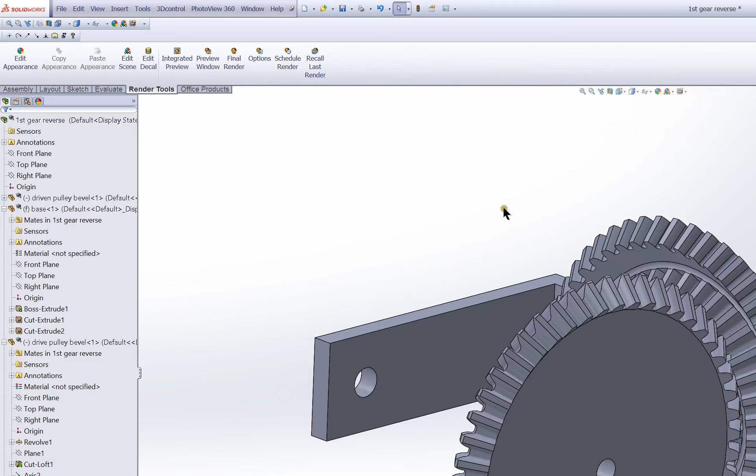This was the project. He wanted to have a set of gears. You can see it better on this edge. So this is first gear in reverse, and then you have other settings like third gear forward, for instance.

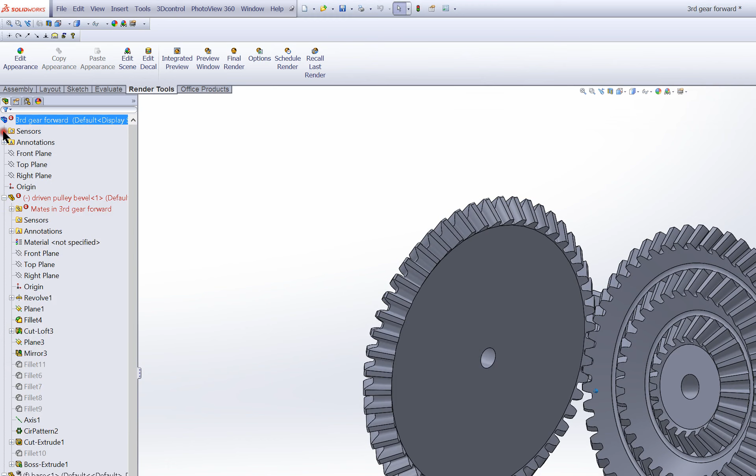There's some kind of error. Yep, hold on, I'll fix this. Okay, I think I fixed it.

So we have different radii, I guess is the correct term. This is a 1-to-1 gear ratio. Here I don't even remember exactly what it is, but it gears down, and I couldn't get it to be perfectly 2-to-1 or 3-to-1, because otherwise it wouldn't really fit in there. But it does gear down quite a bit.

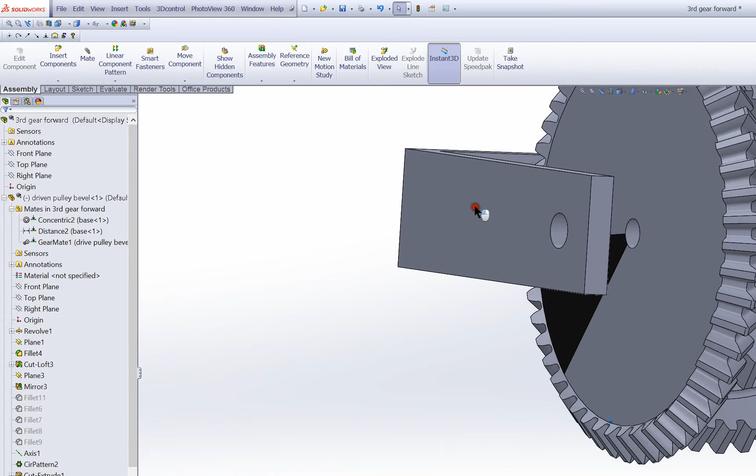I put that black triangle just so you could see more of what's going on. We went with this, called a bevel gear, where you have two 45s coming together. It's not a perfect bevel gear, but it's pretty close.

So I'll walk you through how I built it, starting with this guy because he's a little bit easier. Let's just roll him back.

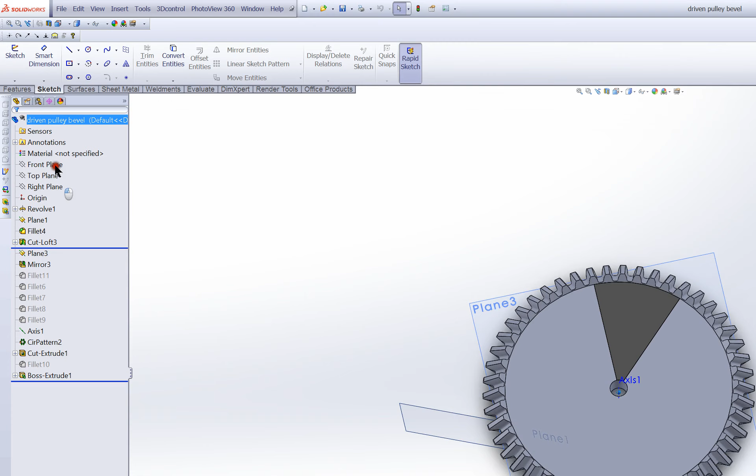Okay, so this is where I started. I started with a revolve that gave me something like that. If you look at the sketch, it's just kind of this weird spike shape. These are all 45-degree angles, so since I'm doing a 90-degree overall angle, I did 45s.

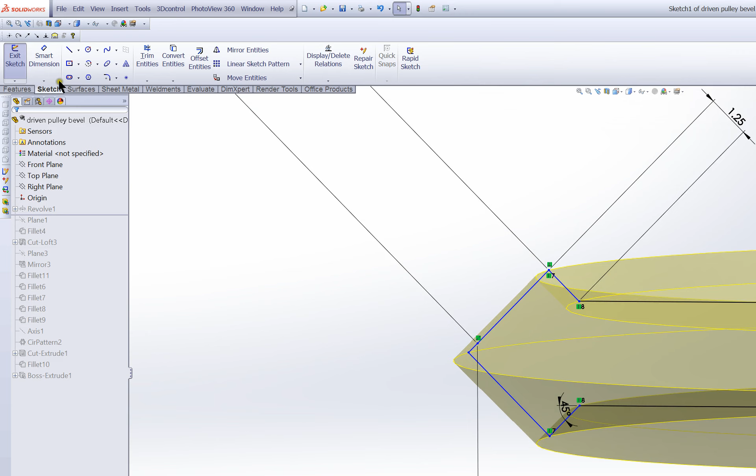These are my dimensions, just to keep them with your original dimensions. So what we're going to do is... okay, hold on, sorry about that, my Solidworks crashed.

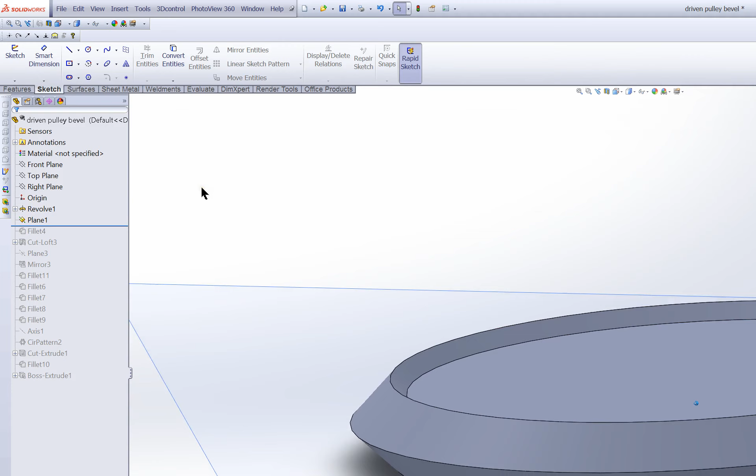So we've got this disc thing, and we're going to be cutting teeth through here with a circular pattern. The first thing I did was make a plane that is normal to there. The way you do that is go to Features, Reference Geometry, Plane, and then choose that guy, and there's a point somewhere over here.

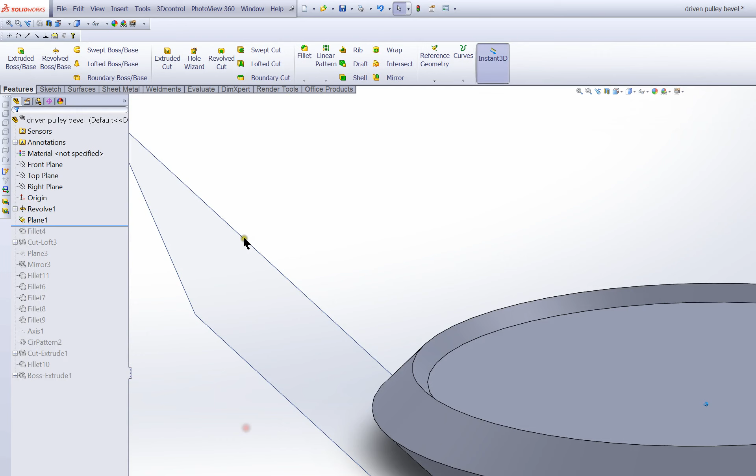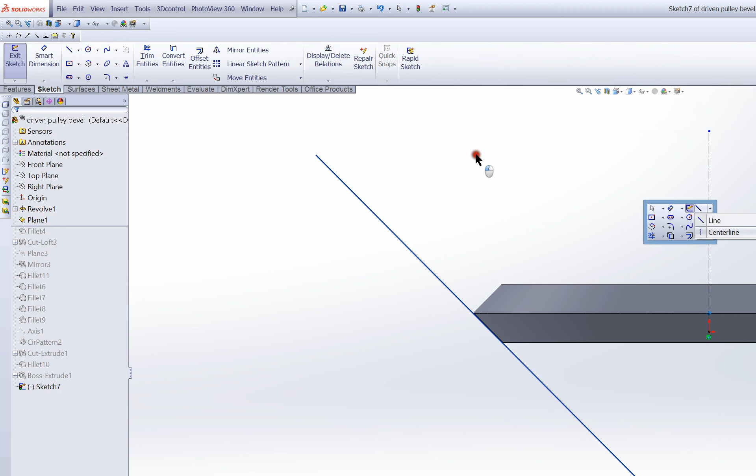So what you do is put a sketch on the front plane. Let's go normal to that. Then you do a center line, and another center line. From here, I'm going to keep it collinear with this silhouetted line here, which can sometimes be hard to select. So collinear, and then you merge these 2 points.

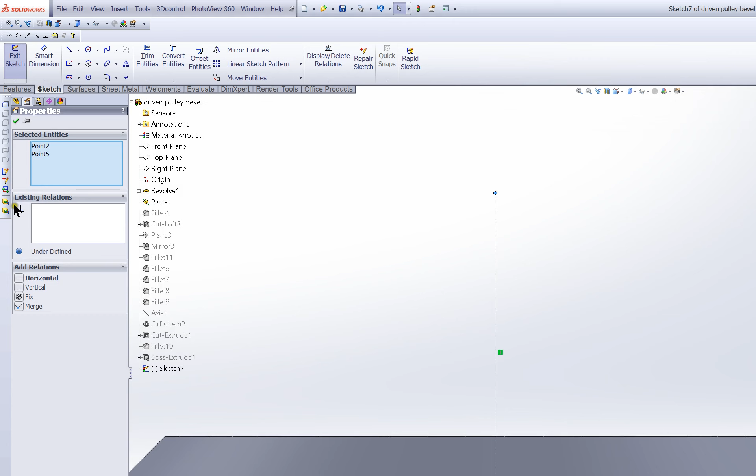Now you have a line that you can make your plane orthogonal to, so you exit out of that sketch. Features, reference plane, select that point, select that guy, and check. And you got your plane.

But we don't really need this plane, I'm going to keep that sketch there just for reference. So then what I did was put a real soft fillet around this edge, so it kind of breaks the edge.

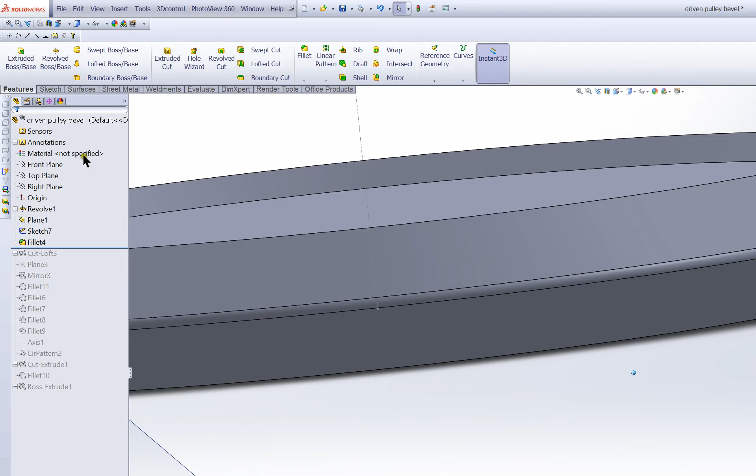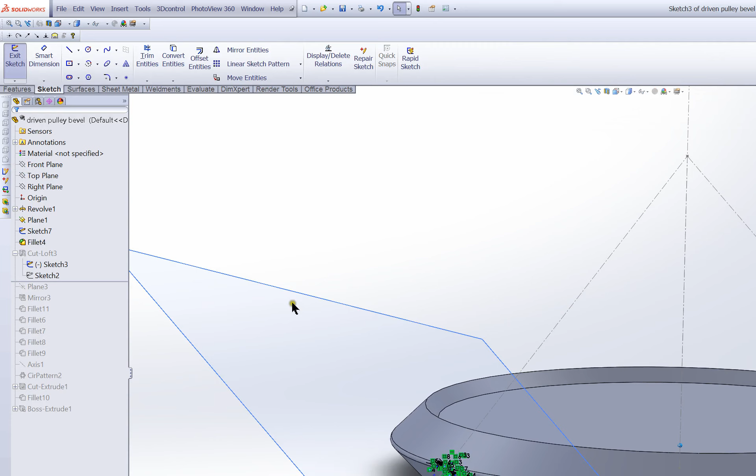Okay, now this is where we start to get technical. What I did was I did a sketch on that plane, and you can see I did a similar sketch just going the other way. Now that you can see it, we can delete this guy's sketch. So I edited this guy's sketch.

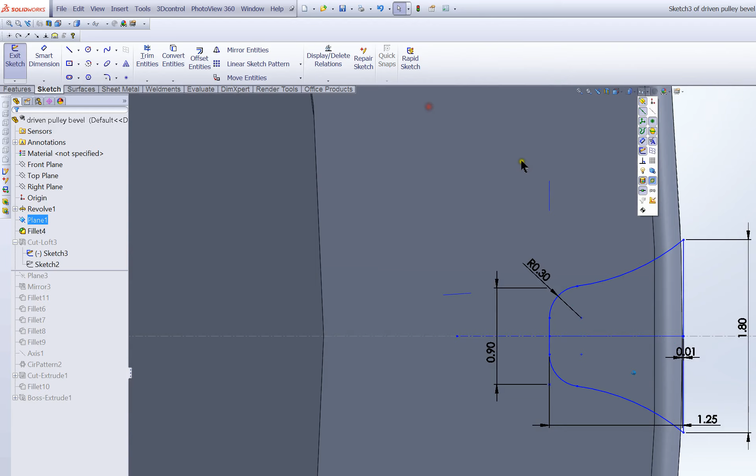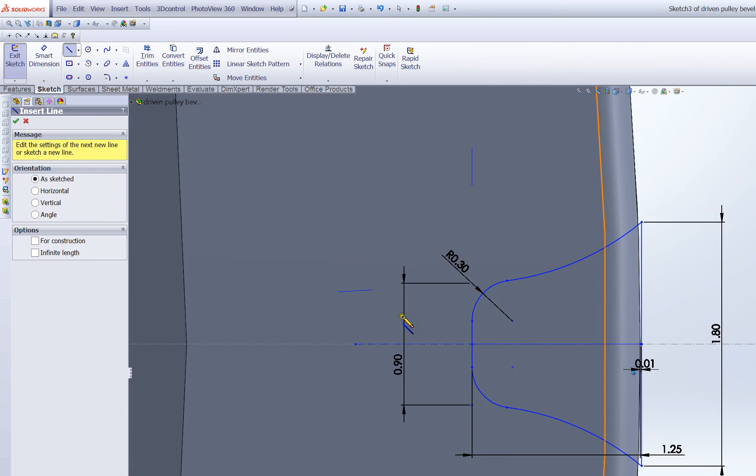Okay, I'll hide the relations because there's a lot of them. So just this kind of shape, I made this a little bit high just so it makes sure it cuts through everything. And then I did a line from here to here, an arc from here to here, and then an arc from here to there. I just gave them these dimensions and kept those consistent across all three of the gear ratios. So exit out of that.

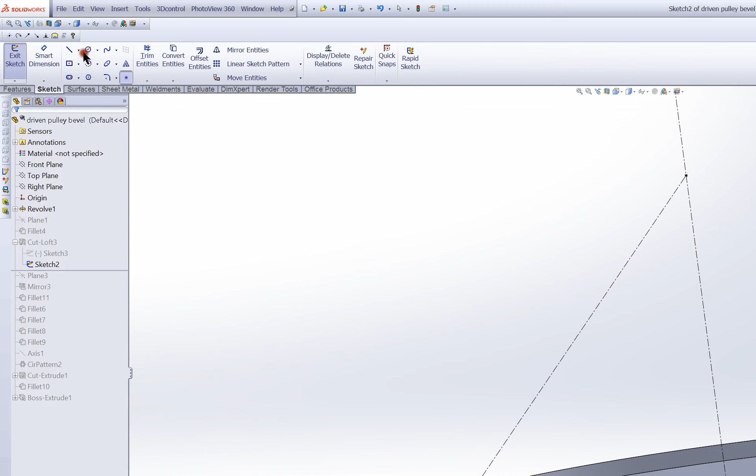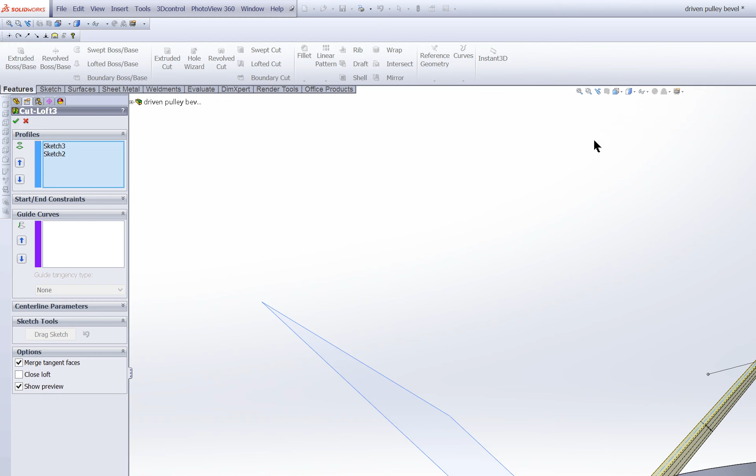And then we've got this sketch, which I showed you before, where it's just collinear and it comes up and hits this point. You have to actually take a point and put a point there. That's important, because what you do is make a lofted cut from this up to this point. If you don't put a point up there, it has nothing to zero in on. So if you're having trouble getting it to recognize that point, you've got to go and physically put a point in. So you select that, and that gives you a nice cutout.

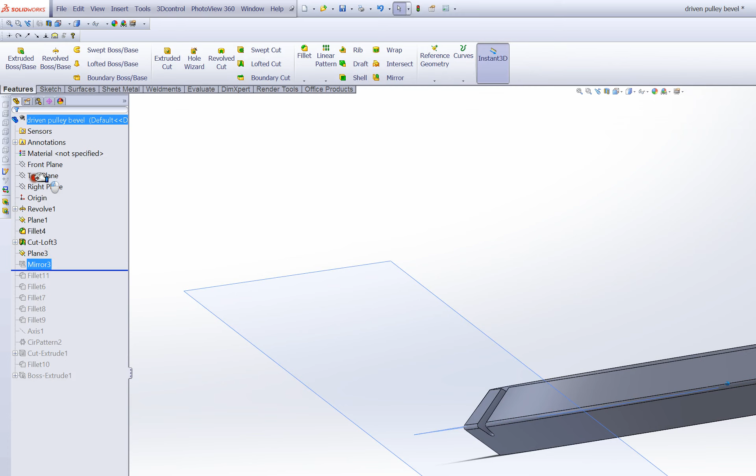And then I put a center plane in, which I selected this top face and this bottom face to give me a mid plane. I did that because I wanted to mirror it. So I just did a mirror of this feature, the lofted cut. And then I filleted something—no, I suppressed that. I suppressed all of these because they aren't needed.

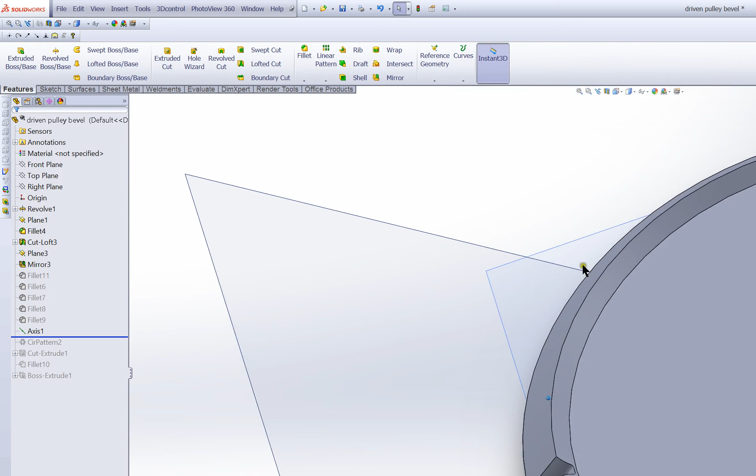Okay, so then I put an axis here. The way I defined the axis was it's in reference geometry. And then I did two planes where they meet, and the front and right planes give me a nice central axis.

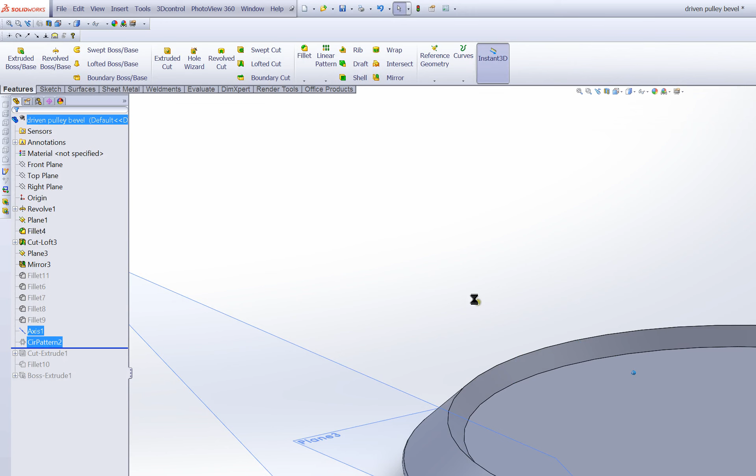And then this is where it starts to bog down, as I did a central pattern, or circular pattern, about that axis with these features. Let's see, how many instances? I did 50 equal spacing, and I just based that on eyeballing it, that they look pretty equal.

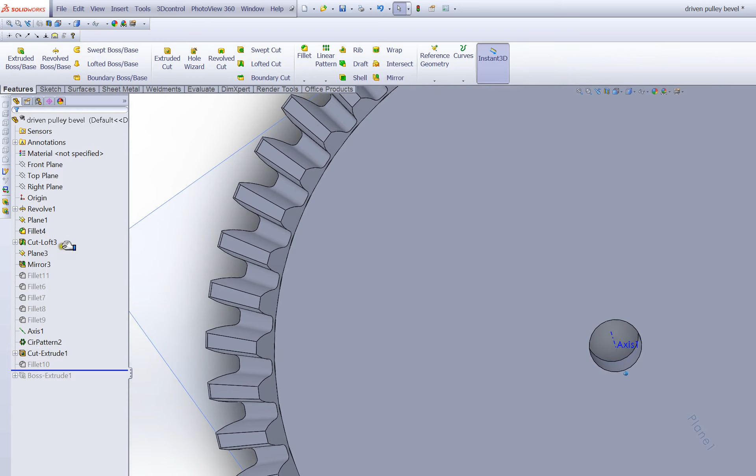And then I cut out the circle. And then I put this little black triangle just so you can see it spin a little bit better. So that is how I made that part.

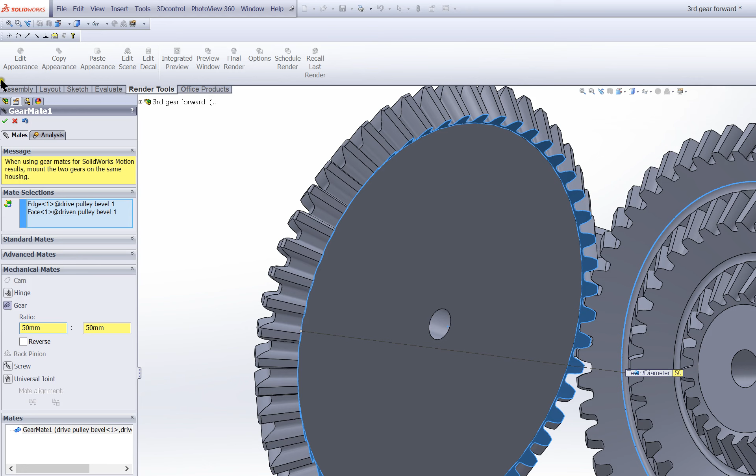And the next one's a little bit more involved. So here we are again. Oops, I got my gear ratio off a little bit, didn't I? There we go. So I will show you how I made this guy.

Kind of looks like a cool little pie. This guy took a little bit of thinking to get done, and it's still not really perfect, but it shows the concept.

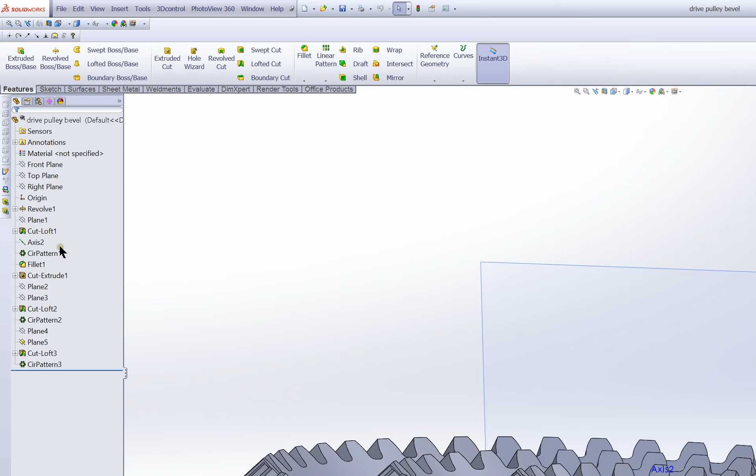So starting from nothing, I did a revolve kind of similar to the last one, just with 3 of them. The sketch, yeah, there's my dimensions. It's kind of like a toothy looking thing.

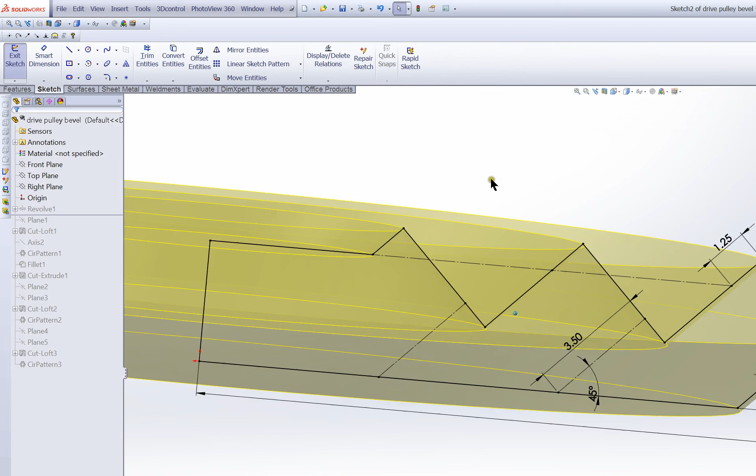I had a length come out here, 45 degrees up, 45 degrees over. I kept this dimension the same off of the previous one because this was the depth of our teeth. And then I made it come down far enough to where our gear would be able to fit inside of there, the little pointed end of our gear.

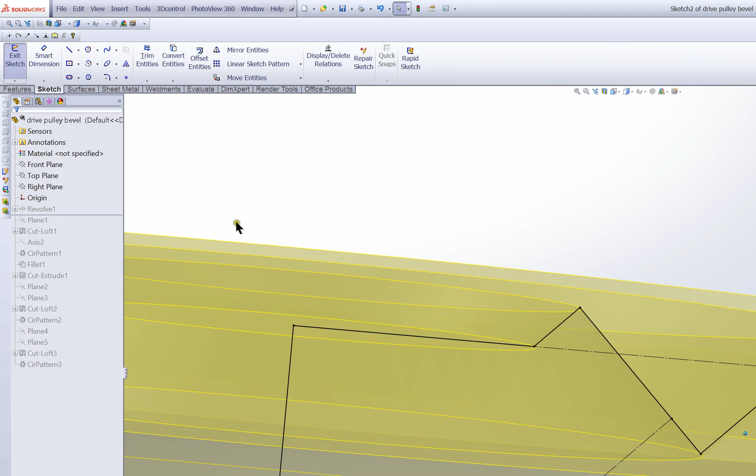And then I just offset these guys over until I had 3 of them. And then I just left the center one thicker just so we have more strength in the center. So revolve that.

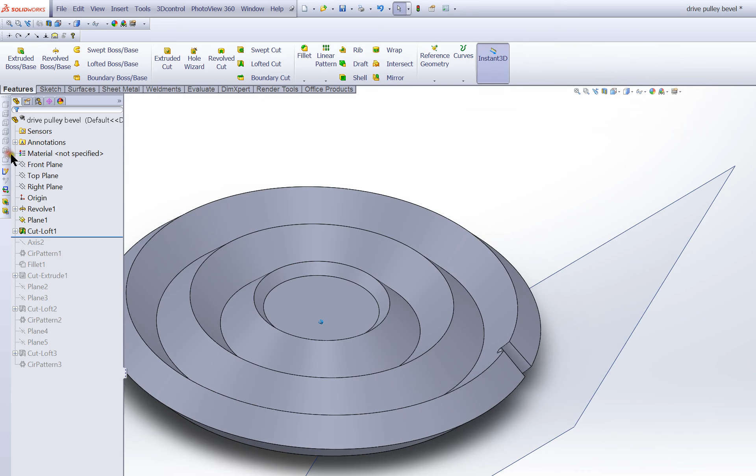I did a similar method, was showing this plane here with this sketch. You actually don't need these guys just yet, so don't worry about those. But same way that we did the last one, just draw a line from there to a central axial center line.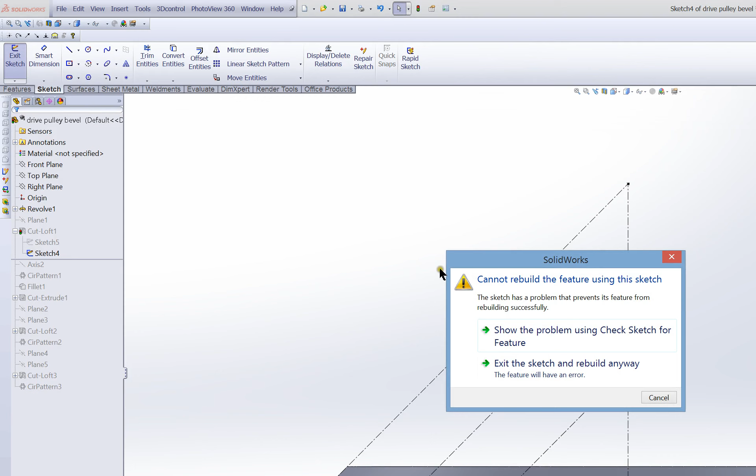Maybe I do need them. Okay, whatever. That's what I get for screwing around with sketches.

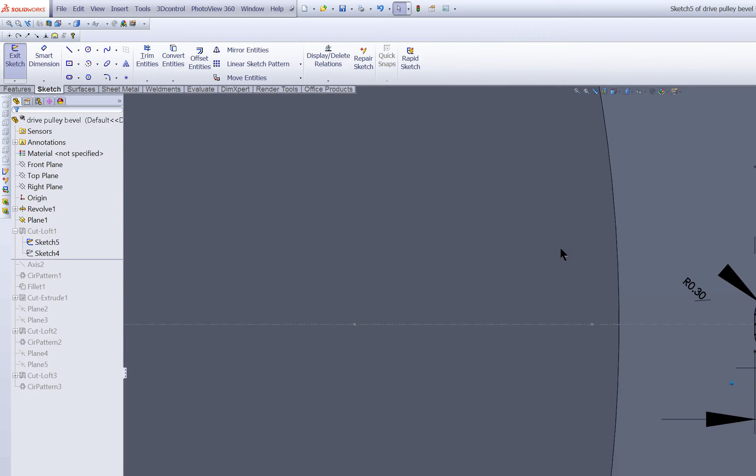And then that allows you to make a plane, just like we did in the previous one. And then we make a sketch. Same exact dimensions, as you can see, as the previous one, exactly the same. And you do a lofted cut.

Same method as we did before. And then we put a central axis and circular pattern it in another 50 instances because it's a 1-to-1 gear ratio.

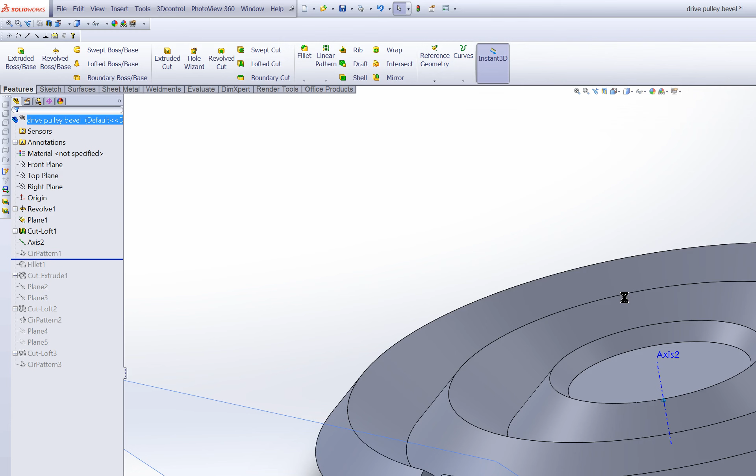And what did I fillet? Oh, I filleted this center, just use these centers just for fun. Okay, I cut out the circle there because I probably was taking a break.

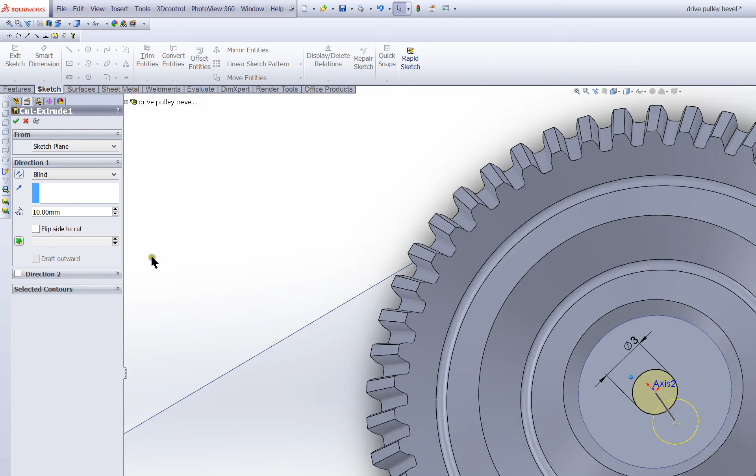I'll show you the dimensions of the circle at least. 3 millimeters, so in case that matters.

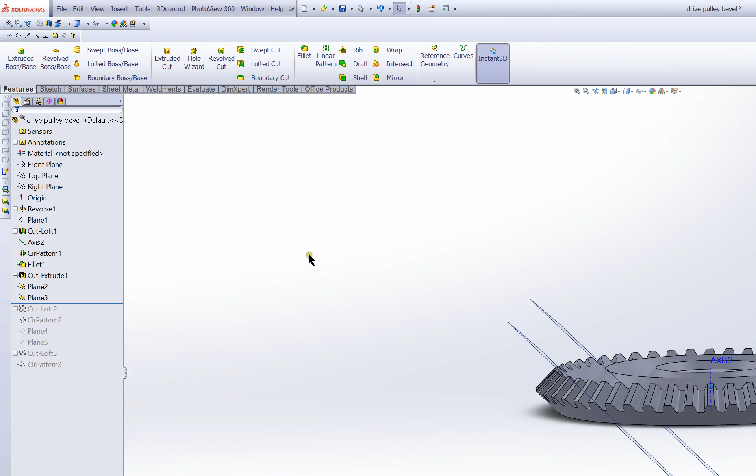So to get these planes, I'm going to go ahead and hide this plane. It's a little bit trickier because you'll notice down here there's not really anything for me to click on to become tangent to it. On this plane I had something to be tangent to, this one I didn't.

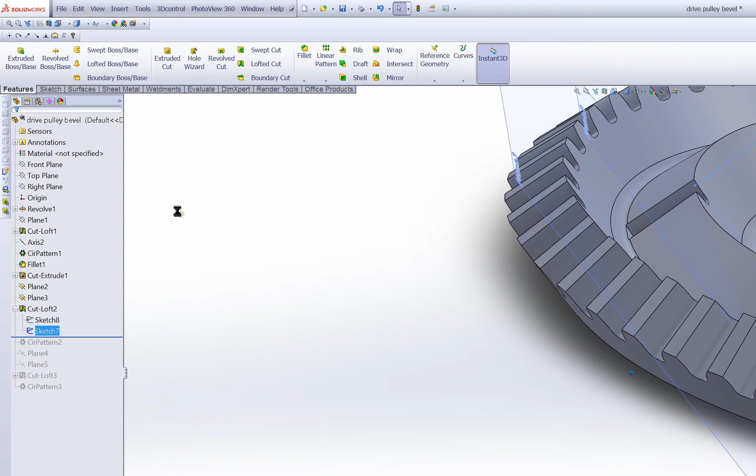So what I did was I made a sketch like this, and then I made this plane, plane 2, this plane right here, I made it orthogonal, perpendicular to that point in that center line. And then this guy, I just made a distance, oops, didn't need to put a sketch, put a distance from this plane, 3.5 millimeters.

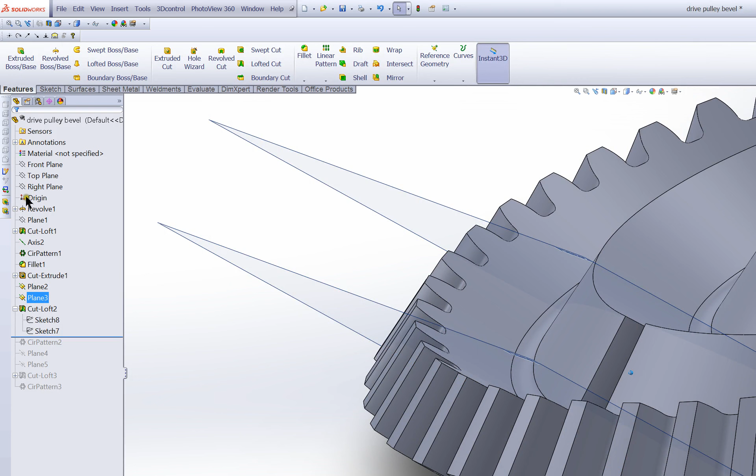And that put him, approximately where he needed to be.

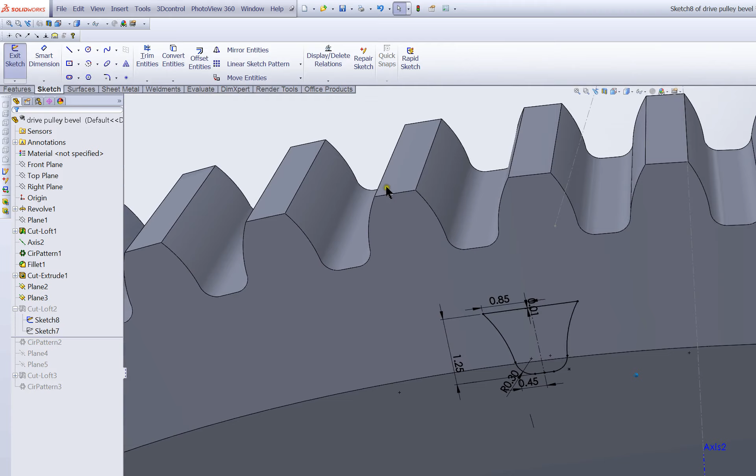And same story with the sketch. I just did a sketch there. Same dimension. I think I had to make everything see-through to be able to see it with relation to everything else. But you get the point.

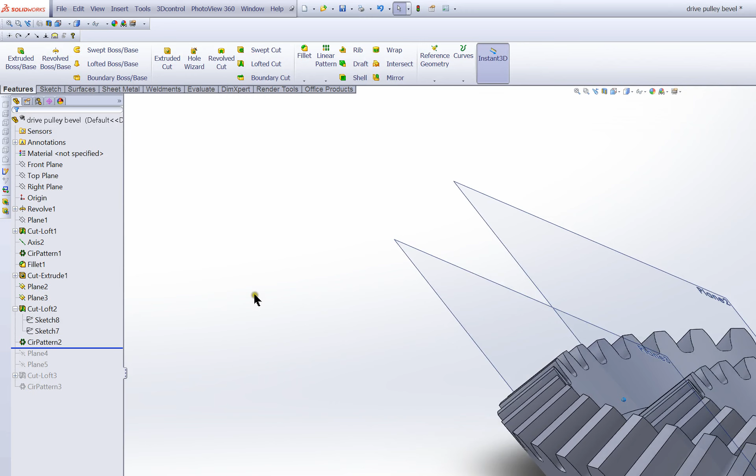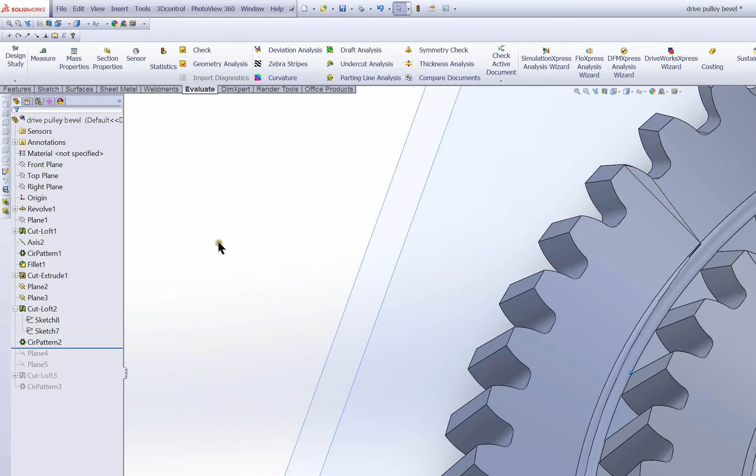And then we did another circular pattern. This one took some more eyeballing, where what I did was did the evaluate measure, and I measured that point and that point, got 0.75 millimeters, and then I measure this point and this point, and I get 0.78. It's pretty close, and it's between two values of gears. So I did 36 gears, which is a little over 2-to-1, a little under 2-to-1, I guess.

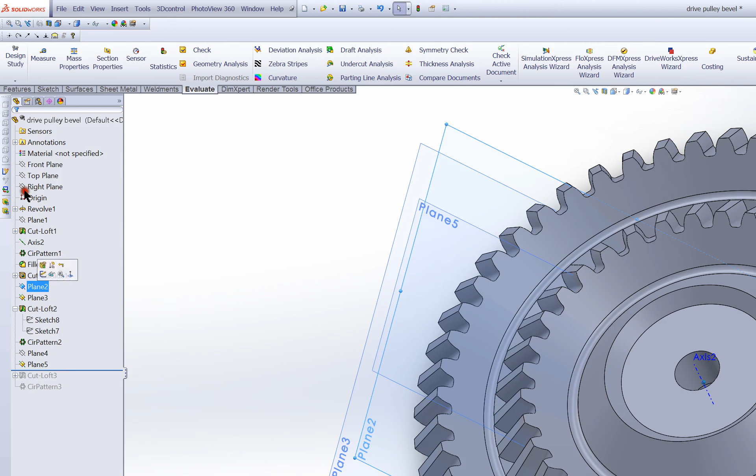And there's your second, and then you just repeat it again. I'll hide these guys. Show this guy.

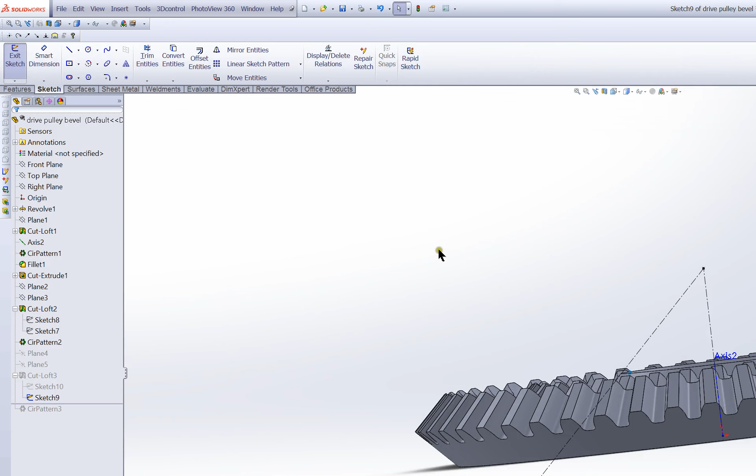Again with sketch like this, make your first plane parallel to the sketch there, and then you put your second plane 3.5 millimeters again, I believe. Yep, 3.5. And then you do the same exact sketch as the previous.

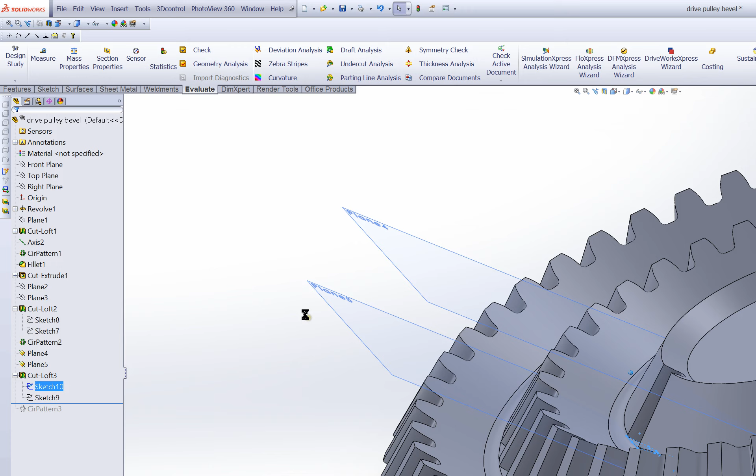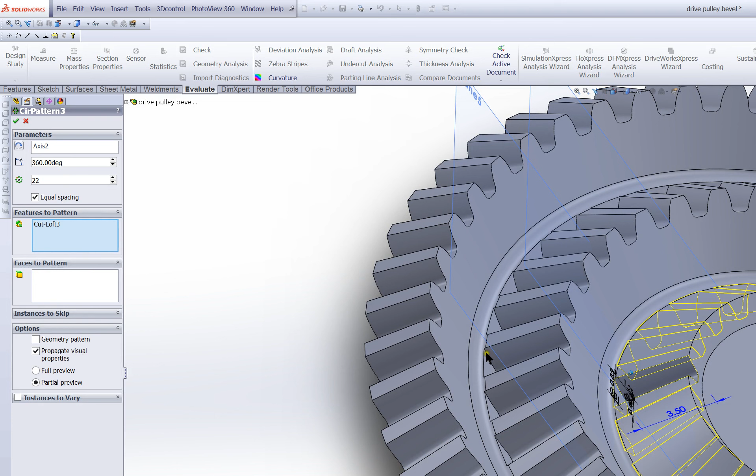And you cut it out using the loft technique again, and you do another circular pattern. You're just kind of guessing until you get a good in-between distance, which in this case is 22. So this is about a 2-to-1. That's just how the radiuses work.

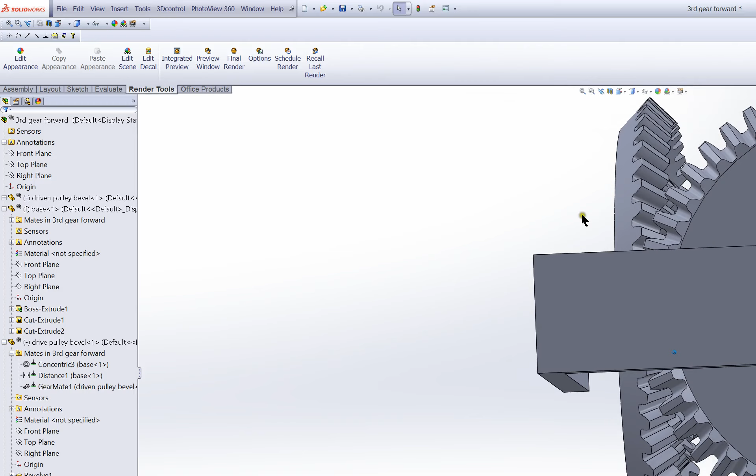So those are the two parts. Now to put them together, I made this guy. He's just pretty much an L bracket with circles through it so that I have something to connect to, just for reference. Nothing special about him, but I'll show you the dimensions so you can make him.

Boss extrude, show sketch. Oops, I didn't put any dimensions on it. That is bad modeling technique. We'll go 30.3, 0.14, 32, 27. No, put a point there. Well, it's not very good, but you get the idea of the dimensions.

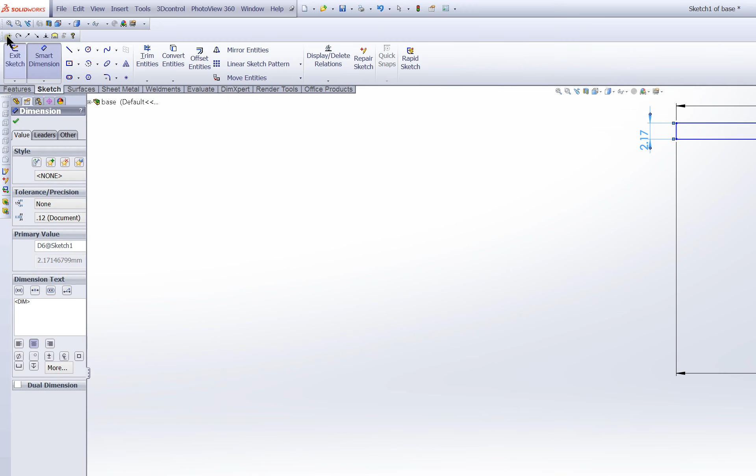And then I put holes. They're both the same hole, 5 millimeters in, centered, 3 millimeters thick. Cut through, same on both sides. So here we are.

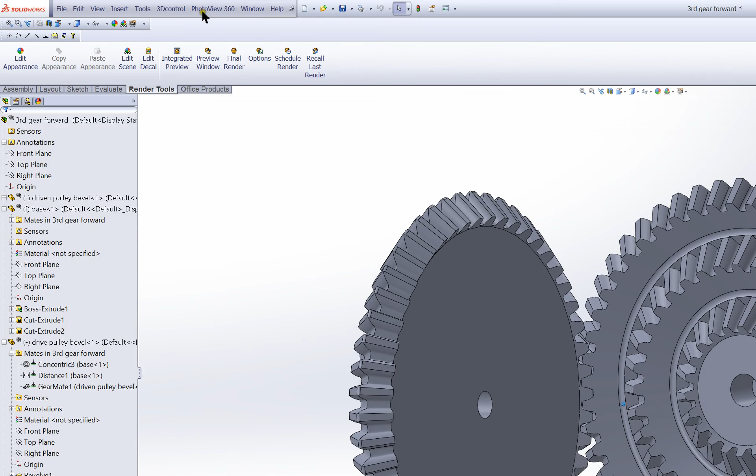So to make this guy, I'll just make a new assembly from scratch. We'll make a base, our center point, press the green to put it fixed right on the axes, and then we will insert our drive pulley.

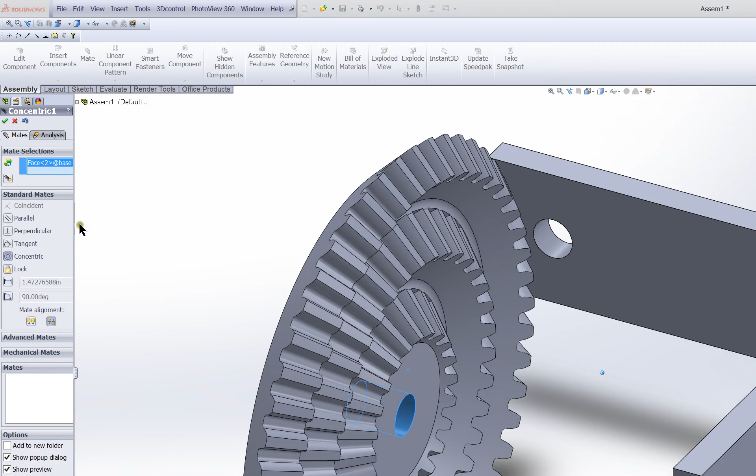Mate this guy to be concentric with this guy, flip it around so he faces the right way. And we'll put a distance mate of like, I don't know, 0.2, I guess we're in... 0.1. I'm accidentally in inches. I'll come down here and put that in millimeters.

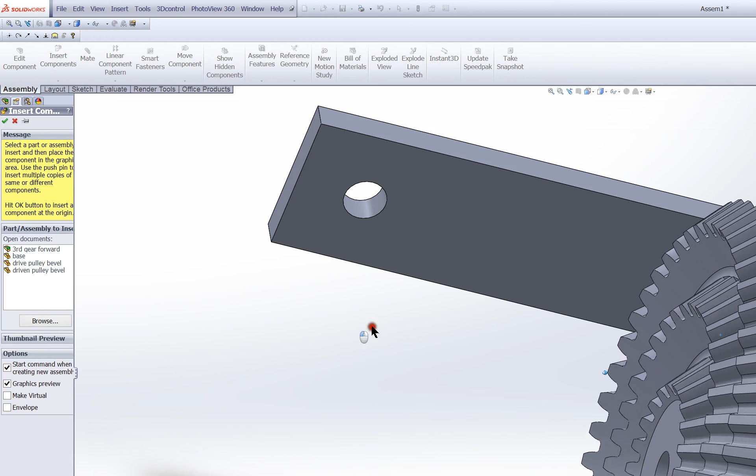Okay, and so what that does is spins around there, and we'll put the driven pulley. I guess they're not really pulleys, they're gears, but same thing. I selected the wrong thing.

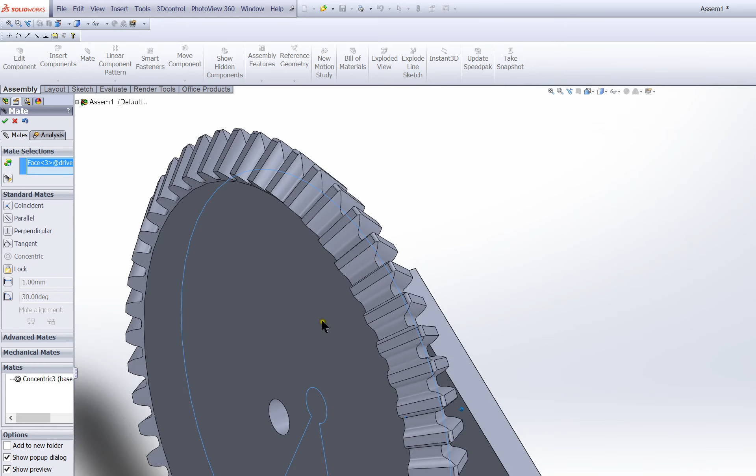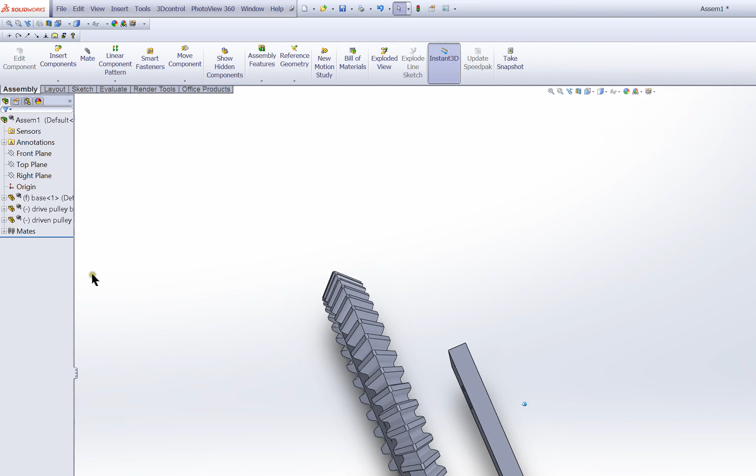And we'll do another distance mate. Let's make him 5, maybe 4.75. No, 4.5. Yeah, we'll see how that works. Oops, did I press exit? I pressed exit. Supposed to press the green check mark. 4.5.

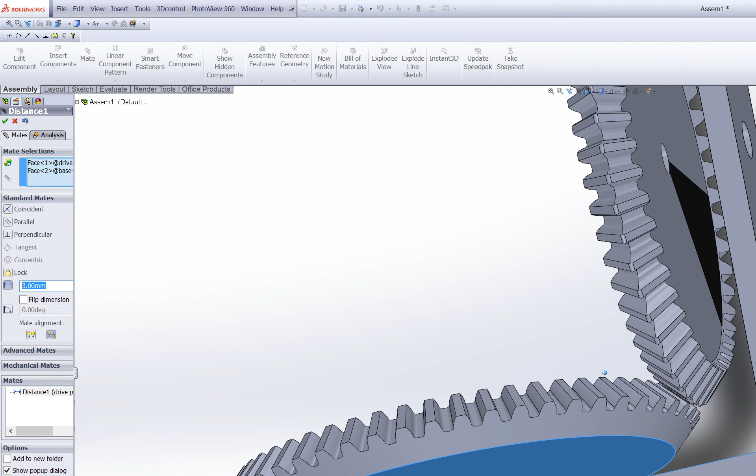Okay, and then we just kind of keep meddling with these guys. That's 3, 4, 4.3. Let's try 4.5. No, it's going to be 4.

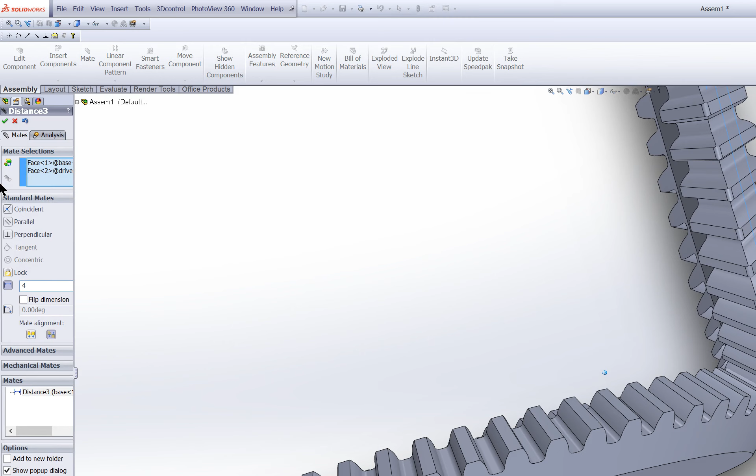No, edit this guy. Let's make him 4.6. 4.8. 4. Make him 5. That's pretty good.

You can see they're kind of in the ballpark, enough for the teeth to mesh for sure. Let's rotate it till the teeth mesh.

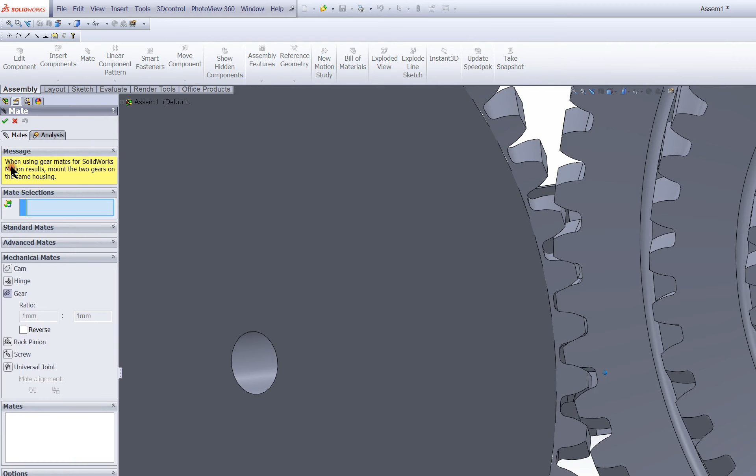And then we are going to do an advanced mate, called, well, not an advanced, a mechanical mate, and it's called the gear mate. What you do is you select a radius. Oh, here, let me try rebuilding. Something was funky. Nope. The mate mechanical gear.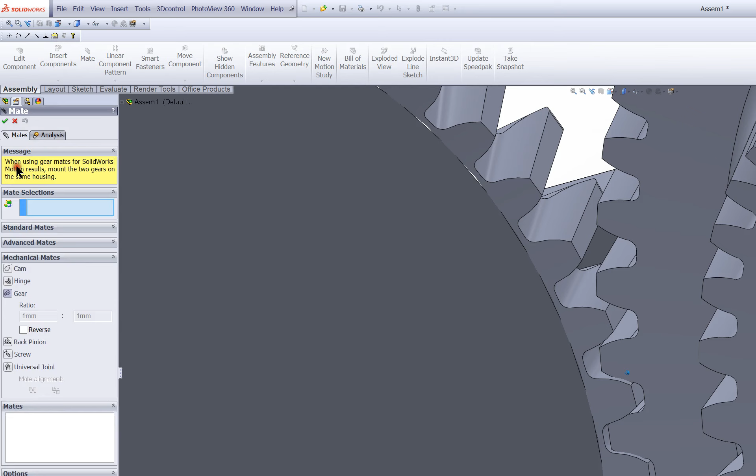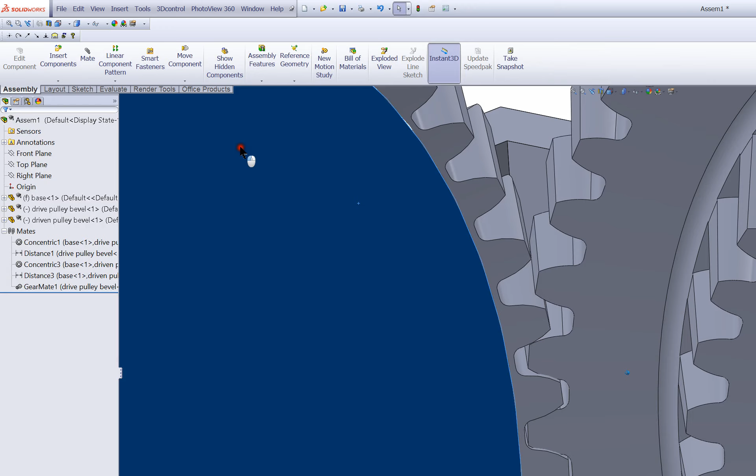Select that, select that. And so no matter what, these two circles are going to rotate together at this ratio. And since we want it to be 1 to 1, they rotate together. Pretty nifty.

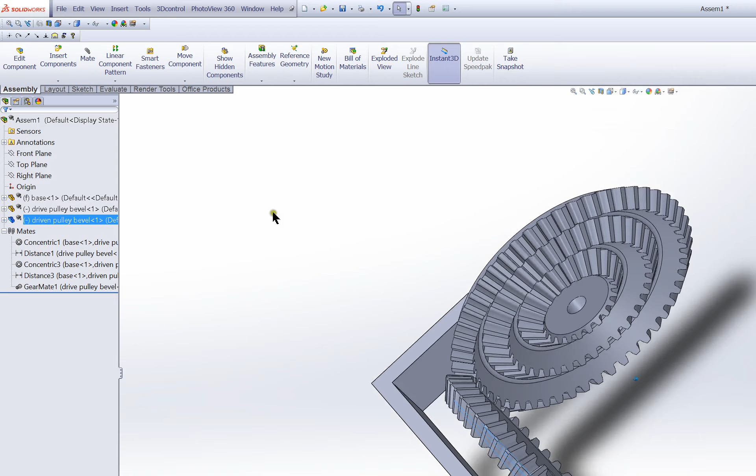And so I left this distance mate the same and just moved these guys, moved this one to that one, to that one, to that one, to that one, to that one. So that is pretty much how I did it.

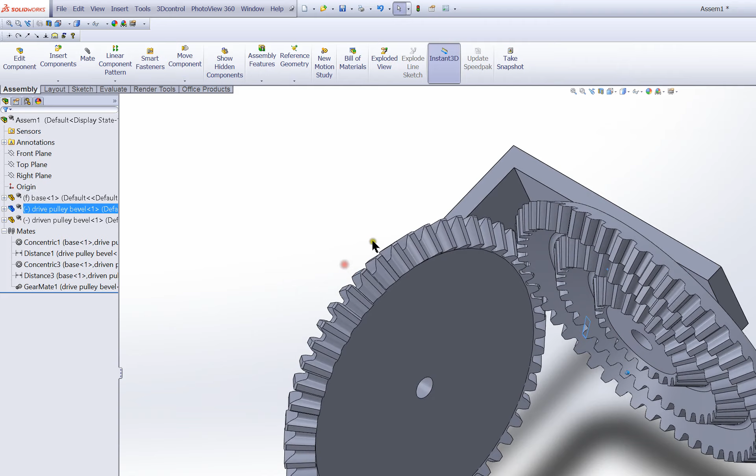You were asking a question about using hydraulics or mechanical to shift. The way I imagine this thing shifting is to have some kind of way to pull this out, move this to its position, and push this back in. So it'd be something like this goes out, this comes over, this comes back in.

And you're going to need some kind of clutch to allow you to do that. But as far as mechanics of moving the gears, I think you could do it mechanically, it's all how you hook up the lever to move the gears. Your clutch could disengage the shaft and move it back, and then your lever could—you have 6 gears, so you could have just 6 positions, like 1, 2, 3, 4, 5, 6, and each one of those positions moves it further along.

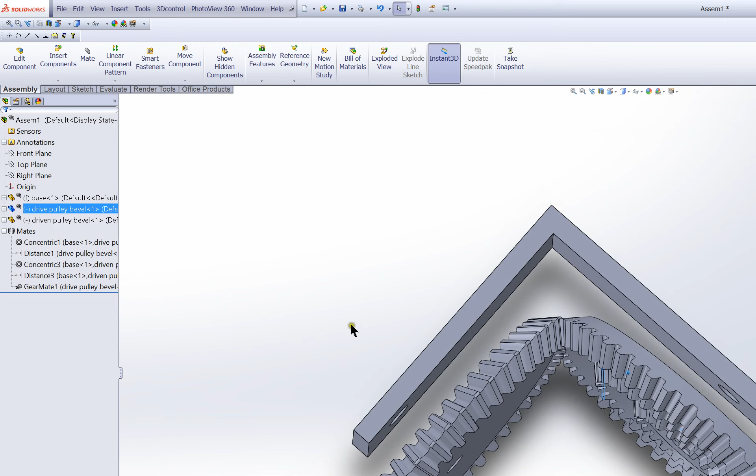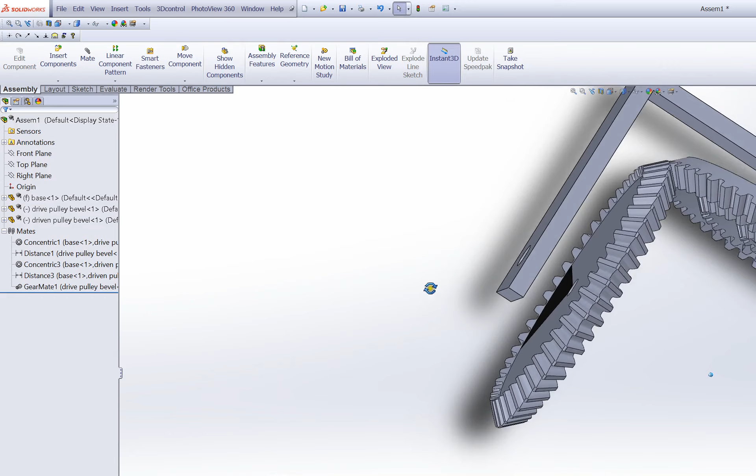So you could do it mechanically, or you could do hydraulically. They both do linear motion, so really it's just how much time and effort you want to put into it. I would say hydraulics would be simpler, just because you could put a cylinder and be done with it. But there's something to say about reliability on hydraulics.

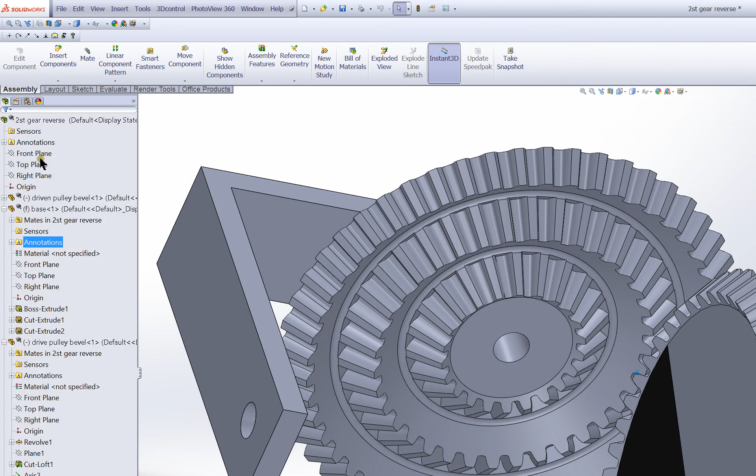But other than that, if you have any other questions about what I did or why I did what I did—well, actually, I will show you one more mate, I'll do second gear. For the gear mate, I did 50 to 36 because I have 36 gears and 50 gears on here, and I did reverse because now we are in reverse. So just something to be aware of.